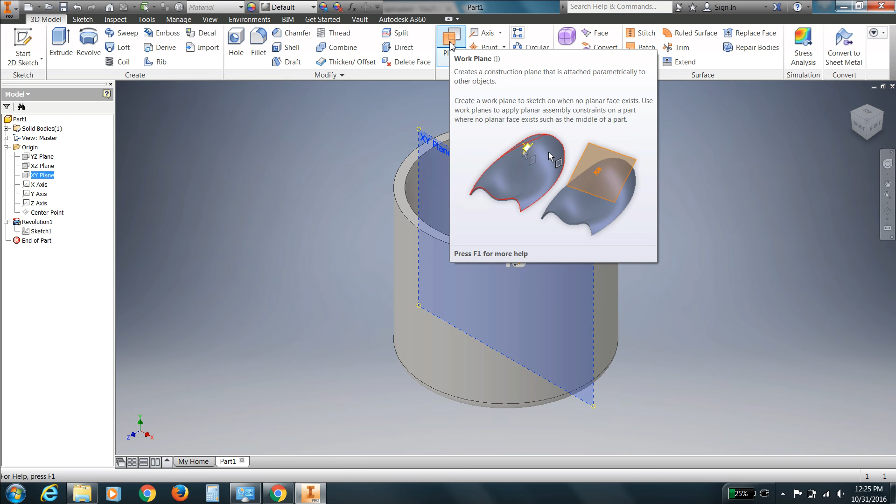And then I'm going to click the planes feature button here. And underneath planes, there's a whole bunch of different features, but these can get kind of confusing. So we're just going to pick the original, the top one here, this plane button.

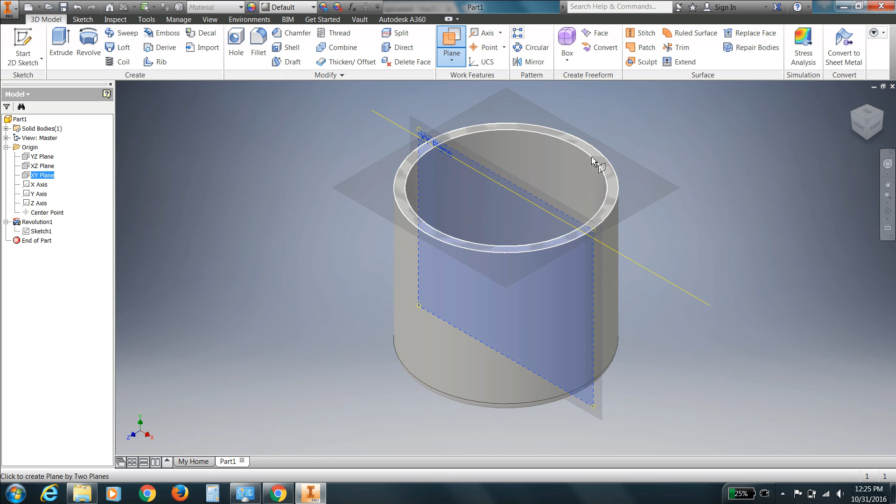And if we go back to the XY plane and we have the plane button selected, we can suggest a place to put a plane. And that plane would be on the edge of the cup. So here it is on the other edge, or on the top. Here it is on the side. Anyway, I'm going to put it over here on the face, and I'll click there.

Now I have a work plane, as they call it, and you see how it showed up in our browser window over here. A work plane on the side of our cup. And I can actually rotate to the front, and you can see it.

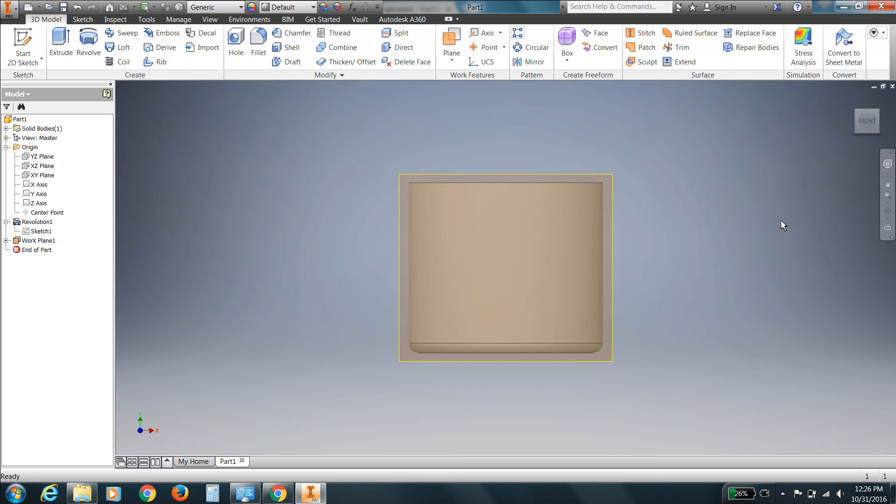Now, you think of a plane like a piece of paper on which you can draw. The question is, how can I start drawing on that plane? Well, you move to the corner of the plane and click the corner, and you'll see the Create Sketch button. So I'm going to create a sketch on this plane or piece of paper. I click that, and now I'm back in my 2D drawing mode.

And what I want to do, and I'll put this back in the middle of the screen, is draw a circle on this. And so we know how to make circles. We've done this before, maybe. I can't remember. Yeah, we've made circles before.

So we'll click on the circle here and head back to the y-axis. It's a good place to do this. And on the y-axis, wherever you think a circle center should be, I'm going to click it. And then I'm going to extend it out, showing, and that little dialog box there is showing me the current diameter of the circle. But I'm just going to use it to sort of judge how big a circle I want.

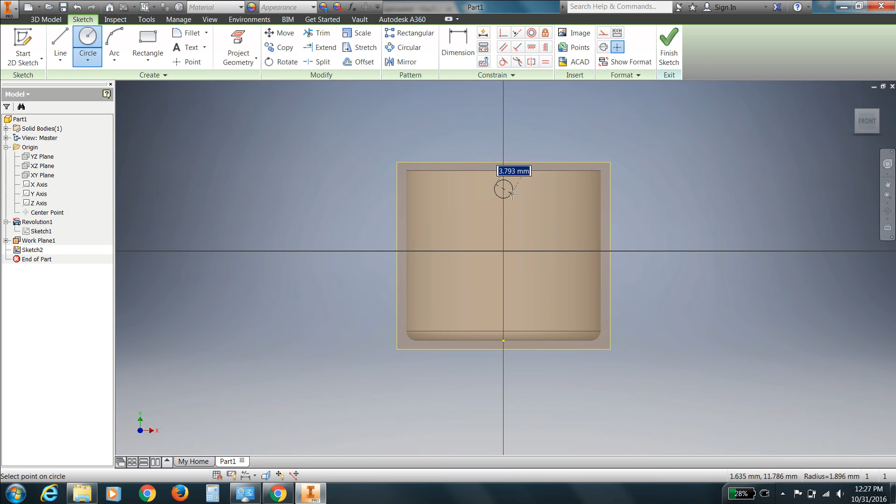So I'm just going to say, okay, my circle about that big, 3.793 millimeters. I could probably make that a 4 millimeter circle. So I'm just going to enter a 4 and enter. And there I have it. I have a 4 millimeter circle. And that's all I need for now.

On your own, once you know how to do this, you might come back and put in more circles for more features on your tea light. But for now, we're just going to have one circle, which is going to become many circles, as you know.

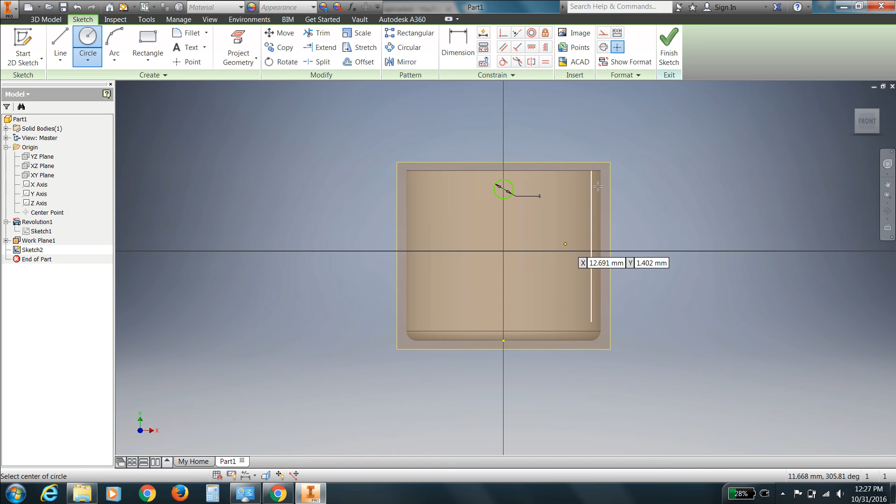Okay, so I'm done. I've edited my sketch, and this is what you always have to remember: when you're in sketch mode, you have to finish your sketch, which is up here, to return back to 3D mode. Okay, so here we are back in 3D mode, and it doesn't look like it, but you can see it automatically went back to the 3D tab up here.

So now I'm going to just rotate this around and show you. There it is. The problem is, in 3D mode, this work plane becomes a bit of a distraction, so I'd like to get rid of it, but I don't want to delete it.

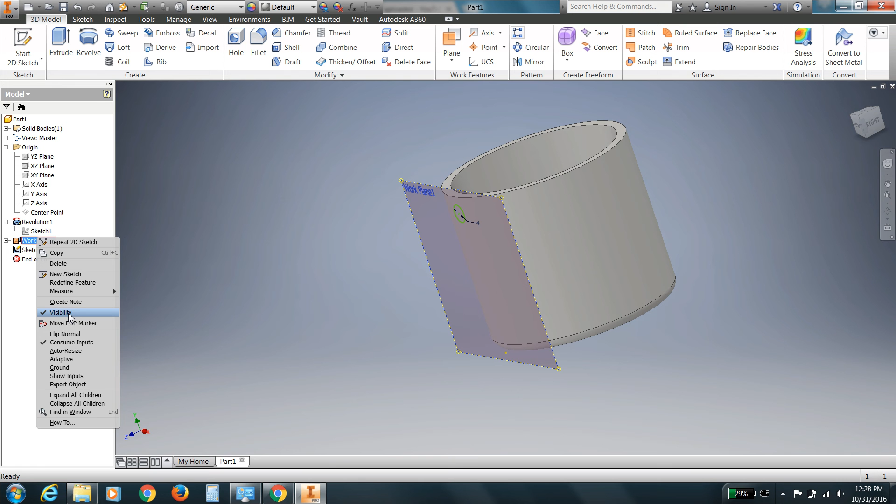I might want to go back and edit it later, so I head over to the work plane in the browser window and select it. It shows in the upper left corner which work plane you're working on, like work plane 1. I'm going to right click on work plane 1 and turn the visibility off. The plane is still available, I just can't see it. I can turn it back on if I want, but that's all I need.

So there I am back on straight up and down. I'm going to tilt this towards me so we can see it a bit. All I've got is a circle drawn on the side of the curved surface. Now I need to turn it into a hole.

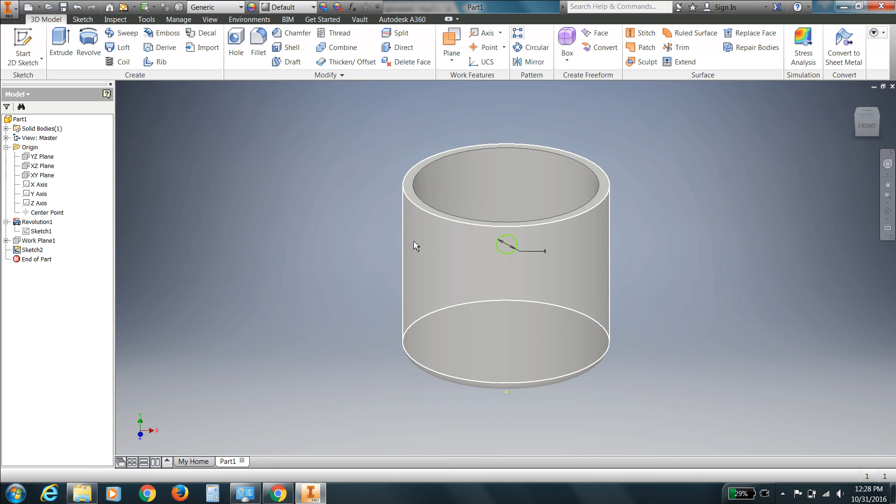To do that, we're going to use the extrude feature up here. As soon as I turn it on, it's suggesting what it thinks I might want to do, which would be extruding a solid outwards from the cup. How about if I go inwards? It's extruding a solid pin inwards now, let me move this out of the way. That's not what I want either.

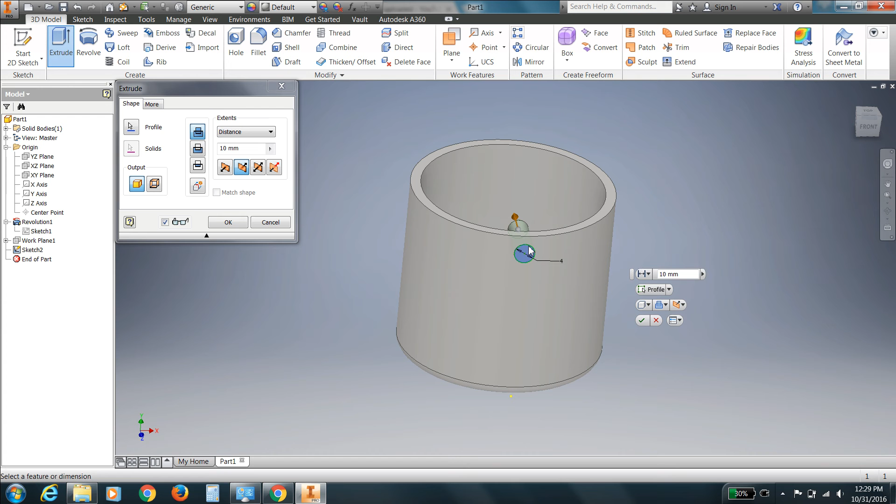I do want to extrude inwards, but I don't want to extrude a solid. So I'm going to change the join feature into a cut feature, and hit cut. There we go. Now I've cut 10 millimeters in, which is fine.

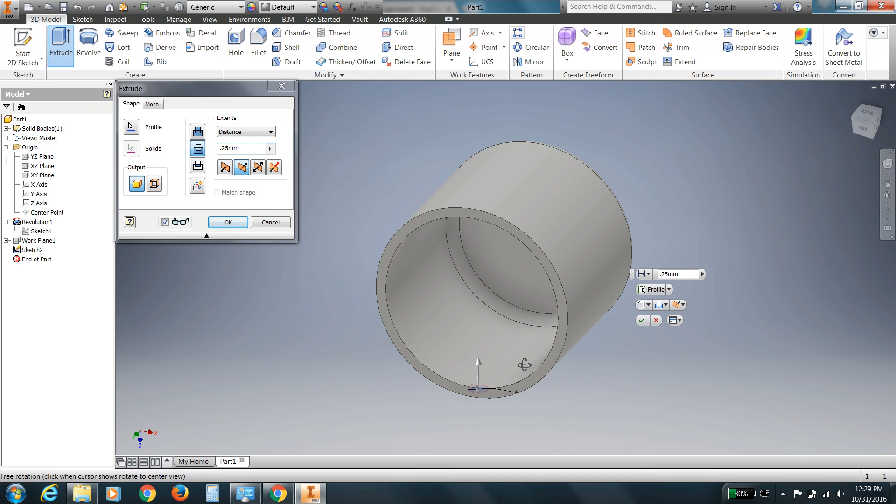I'm just going to cut into space here. I have to make sure this is set if I want to go all the way through more than the thickness of the wall. If I set this to a smaller thickness than the wall, like 0.25, it doesn't go all the way through anymore—it goes partially through, which you might want to do one day, but today I want to go all the way through. So I'll change this, push OK, and when I'm finished, I have a hole through my cup.

The last thing I need to do is make many holes around the cup, which is easier than you think. You don't have to draw them all or make work planes for them all. All you have to do is invoke the circular pattern feature up here, so I'm going to click that.

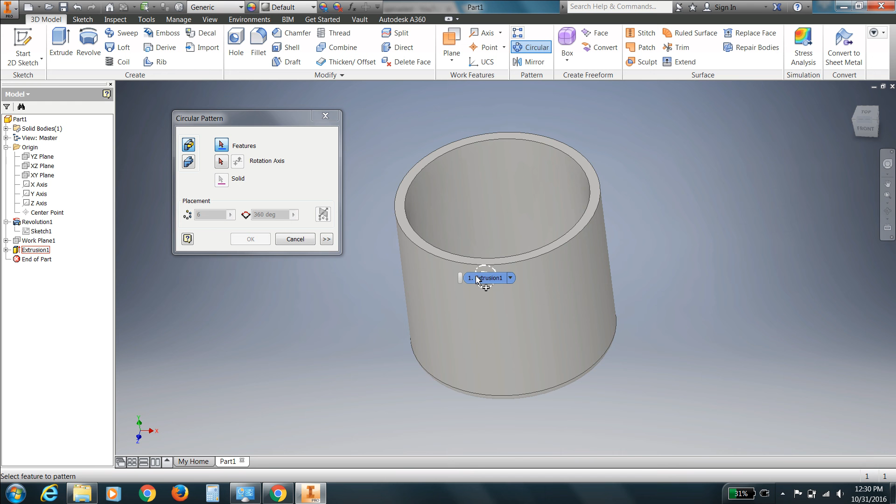I get another dialog box, and I'm going to click my feature—I have to click the object first, then go back and click feature. Now when I hover over the object, I want to make sure the only thing I click is the feature I'd like to make a pattern of. So this hole, click. Notice it turned blue, meaning I've selected it. Now what I do is revolve it around the axis.

So I click. Now which axis? In this case it's the y-axis up the center of the cup. I head over to the y-axis and do that, and it reminds me, yeah, that's up the center of the cup. I don't want the z-axis, and I don't want to revolve around the x-axis—it's the y. If I click that, you see it puts holes all the way around.

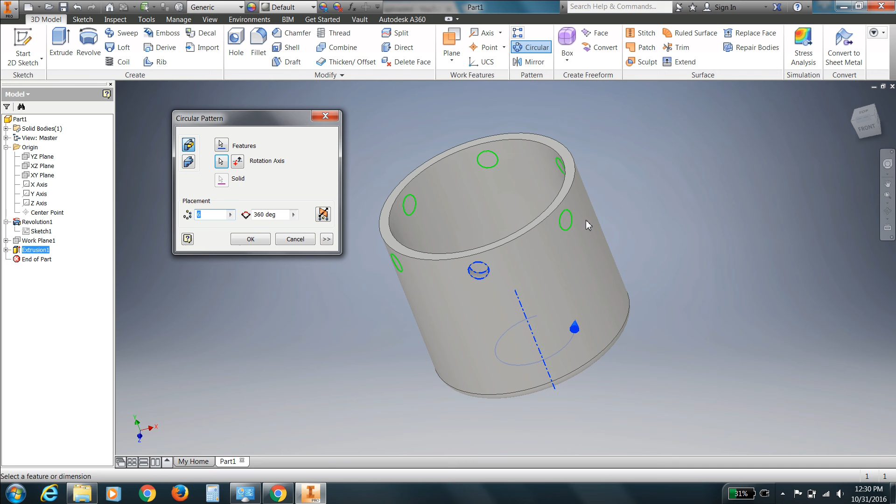How did it determine that many holes? Actually, it isn't putting the holes yet, it's just putting indications as to where the holes will be. It determined I wanted 6 by default, but I don't like 6, so I'm going to make it 18 holes. That looks pretty good to me, and now I'm just going to push OK. Boom, 18 holes are created.

Now, circles are fine, but you could do squares or triangles—they might get a little more challenging. There might be some things you bump into along the way, but that's part of it, doing some exploring. So this is how to make piercings or holes around a circular object using the pattern feature. Hopefully this gets some creativity going and you start doing some things.

Speaking of creativity, I haven't shown you yet, but maybe you want to try putting text onto it. That's a possibility—it's a little more challenging, but give it a go. I'll offer another tutorial shortly, not yet, on how to put text on the side, but that's it for this tutorial: putting holes in a circular object and spacing those holes around the object.